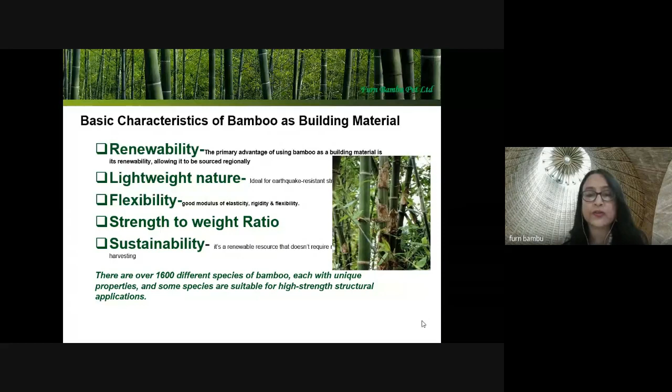There are about 1,600 different species of bamboo, each having their unique properties. Each species has some qualities. Some are good in strength, their structural strength. Some are good for applications in handicrafts and other things. I think in India there are about 120 to 125 species.

So now I'm talking about engineered bamboo. What is engineered bamboo? It is also known as processed bamboo, when we are converting the natural bamboo into an engineered form. Generally, there are three types of engineered bamboo. One is the laminated form, or you can say the strip-based form. They are also known as panel boards or glue boards. In China, it is very common.

Another engineered form is a composite of rough strips crushed together. They are known as strand woven boards. Then there is flattened bamboo processed board. All these engineered forms are based on the type of production technique we apply in manufacturing.

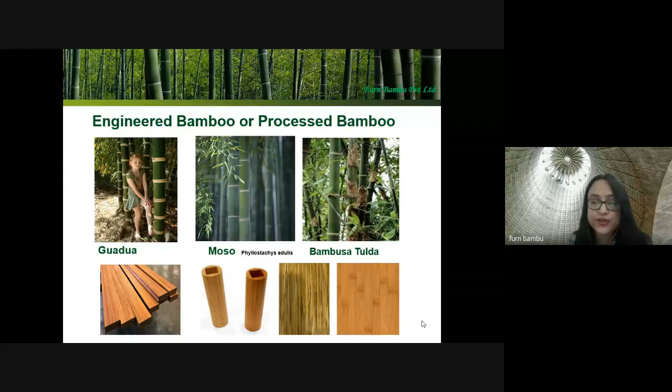The next one is Moso. It's the most common and widely used bamboo in China to manufacture most of their engineered products. Whatever bamboo-based utility products you find in IKEA are made out of this species. Then Bambusa tulda, which is known as Jati bamboo in Assam. This is also an ideal bamboo for making strip-based boards or engineered boards.

Now I'm giving you an overview of the process of making engineered bamboo. For manufacturing a strip-based board, you have to cross-cut it to length, make the strips, and go for either 2-side or 4-side planing. Then you have to dry those bamboo strips and select which ones are to be used. And then you have to go for carbonization. I don't know how many of you are aware of carbonization.

Carbonization is a process where you remove the starch from the bamboo. Actually, bamboo is sweet; it has starch inside it. That makes it very attractive to insects and borers, so you need to remove that, and for that the carbonization process has to be carried out. It depends on the number of hours; it can be 3 hours, it can be 4 hours. This is also known as caramelization of bamboo.

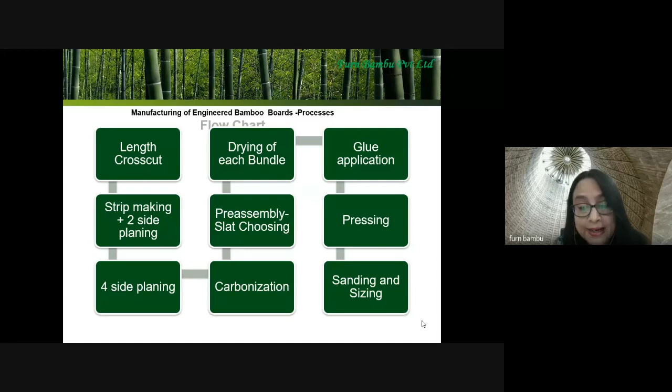After this process, you have to apply the glue. Glue can be of various types, phenol formaldehyde or EPI and many others. After proper application of the glue, you go for hot pressing of the slab we have chosen. Then you get the end product, which needs sanding and sizing, and you get engineered bamboo boards. Now you will ask me why in Terminal T2 this is round: after sizing and sanding, they have converted it into a round section using processes like lathe and others.

So my topic comes to why engineered bamboo has been used in Kempegowda International Airport Terminal T2. As you all know, it is one of the most innovative airports in the world. It is a terminal in a garden spread across 255,000 square meters. The architects and engineers initially thought to use natural bamboo poles for ceiling, column cladding, beams, railing, etc. As we discussed earlier, natural bamboo poles have advantages as well as challenges in terms of uniformity, availability, treatment process, appearance, standardization, life cycle. Measuring the performance of natural bamboo is not an easy task. So after a lot of discussion, they went for engineered bamboo.

Skidmore, Owings and Merrill, New York, are the principal architects of this project. They chose engineered bamboo because it is better than any tropical hardwood or non-renewable carbon-intensive material like PVC, metal, steel, aluminium. As one of the most innovative airports in the world, it is an amalgamation of contemporary design celebrating the rich and diverse culture of India.

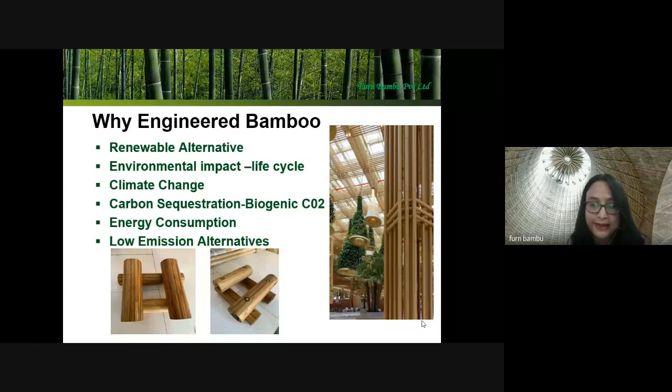So these are some pictures of the application of engineered bamboo in Terminal T2 of Kempegowda International Airport. So many engineers, architects, structural engineers, and designers are involved in the whole process. This bamboo has been used as a cladding material for roofing, for ceiling, for columns, the handrails. Handrails are being done by us, and our workers are still working in Terminal T2.

These bamboo, what you are seeing here in Kempegowda International Airport, are known as bespoke bamboo. They conform to the National Building Code of India. They conform to the ISO standard. They conform to our Indian standards for preservation, for testing, for moisture content, for fire safety, for coatings, etc. They also conform to all the British standards and even ASTM, American Society for Testing and Materials, which includes standard practice for installation of ceiling suspension systems for acoustical tile and lay-in panels in areas subject to earthquake ground motion.

Majorly here, three types of sections have been used: one is 80 mm, another is 60 mm, and another is 40 mm. All are coated with a sealer coat, UV resistant coat, and most important, fire coating has been given. These are fire retardant engineered products. I don't know how many of you know that designers Abu Jani and Sandeep Khosla are also there for making the interiors and other reflective.

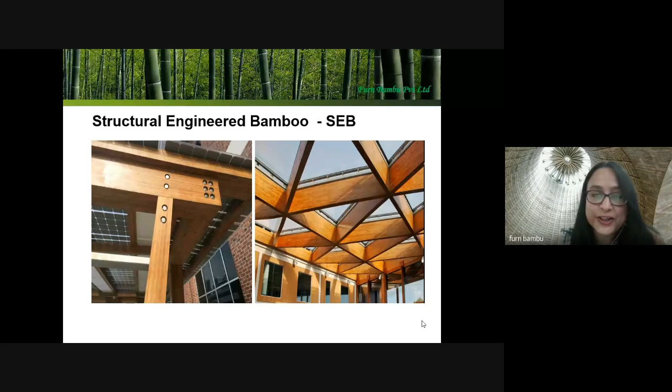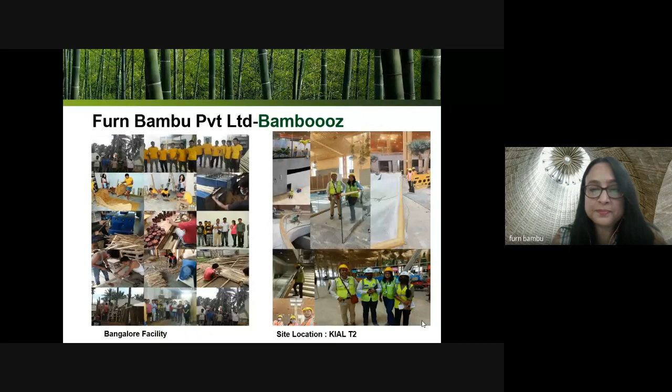Then my final slide. Thank you very much, IDC Talks, for giving me the opportunity to share my understanding and knowledge on engineered bamboo and its application. Thank you.